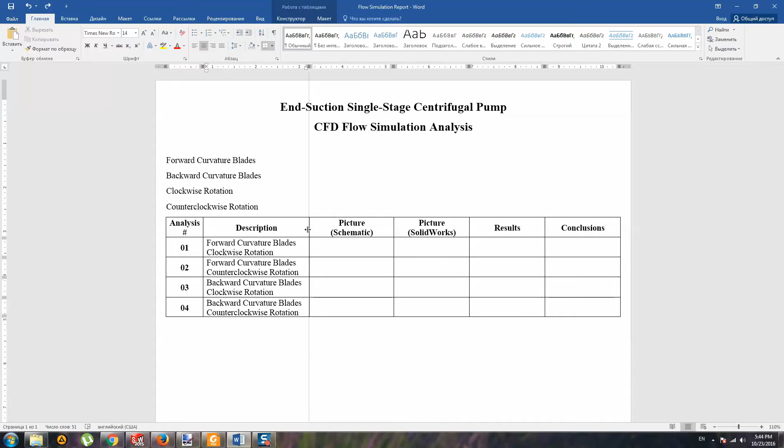For better understanding of what I mean about forward curvature blades, and about direction, counterclockwise and clockwise, I'll show you schematic pictures. This is forward curvature and clockwise direction, forward and counterclockwise. This is backward, clockwise, and backward with counterclockwise.

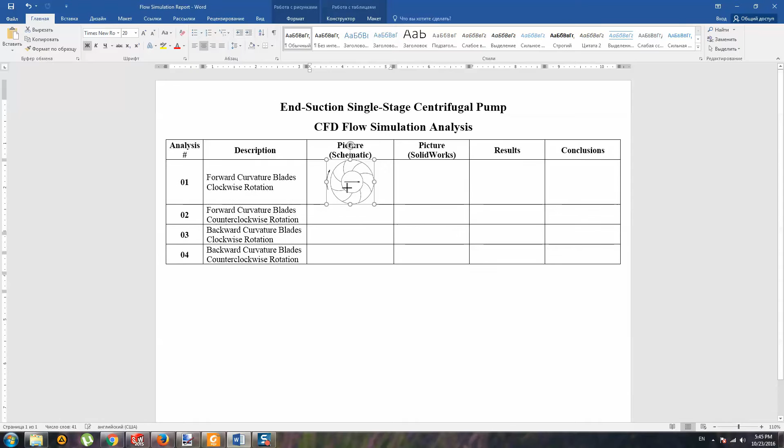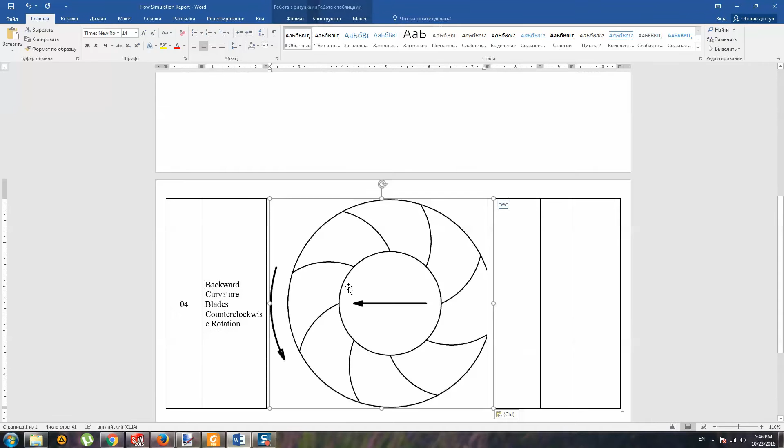This picture I'm adding in this chart. Need to make it some smaller. Yes, ready.

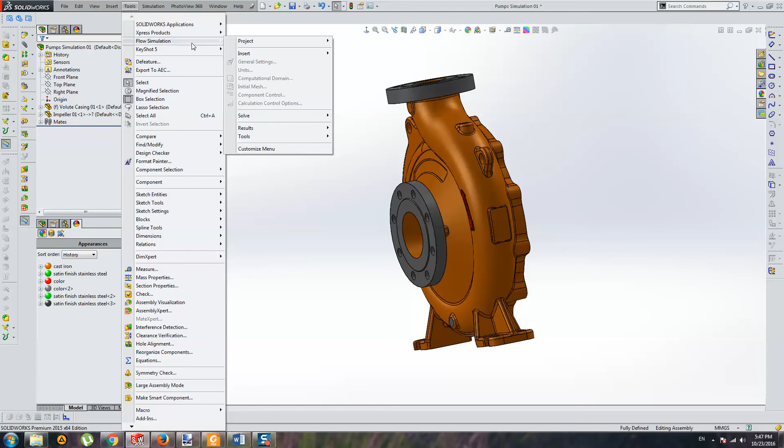What you need to know about model preparation for flow simulation: all holes, all fluid spaces should be closed. For example, I close these holes with pipes, inlet and outlet pipes.

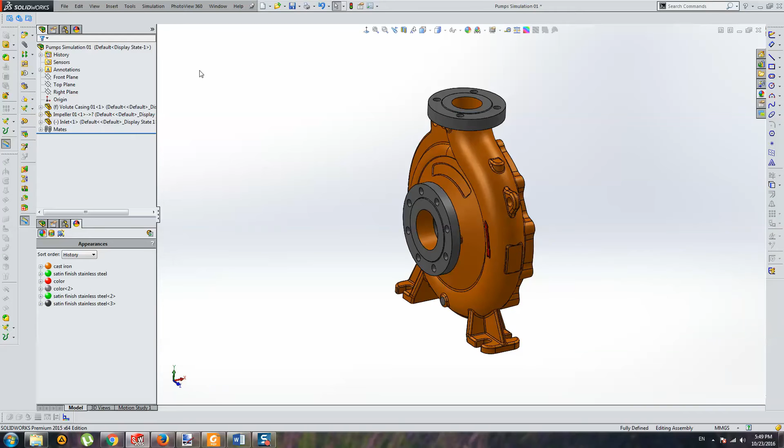Let's build these pipes. I create a new part, open this part, save as this part, and call this part, for example, inlet. Next, I need an outlet. Create new part, open, save as, and call it outlet.

Yes, ready. Let's build. Open inlet in edit part, and we can build a pipe for this flange. Convert entities. First need to create a sketch on this plane and convert entities, this edge. Yes, ready.

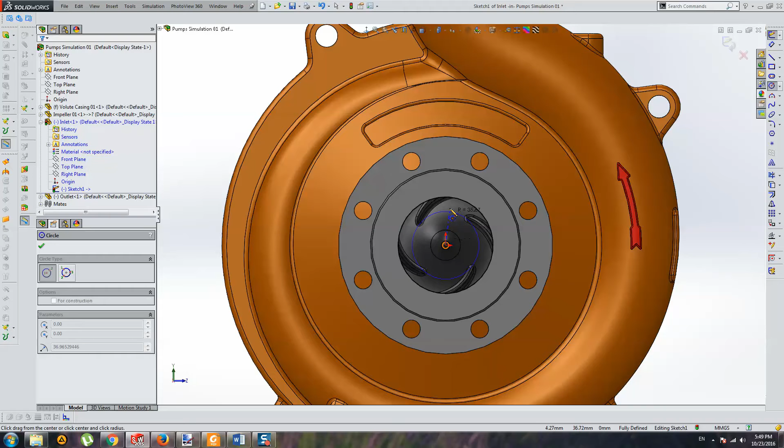Also, let's create wall thickness. I think maybe 5 millimeters, 6. Let's do it 6 millimeters. Having some problem breaking. 6. Ready. And extrude this pipe.

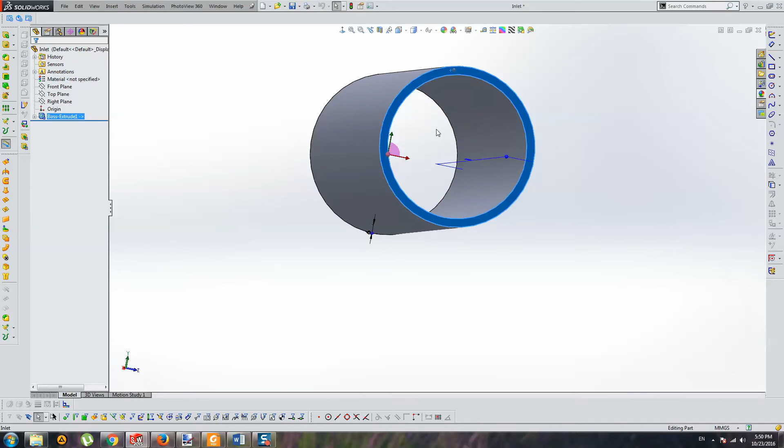For example, 250 millimeters. I can open it. Also, this hole should be closed, but you can close it in the model directly - this hole - but in Flow Simulation you have a function for closing this hole.

I'll show you the second version using Flow Simulation. And now let's build the outlet pipe. Edit part, create sketch on plane, convert entities. Next, make an offset entity of 6 and extrude this pipe in the y-axis direction. For example, it would be 2 meters.

Yeah, good - oh, that's big, very big. 1 meter. Half meter - yeah, half meter will be good. Ready.

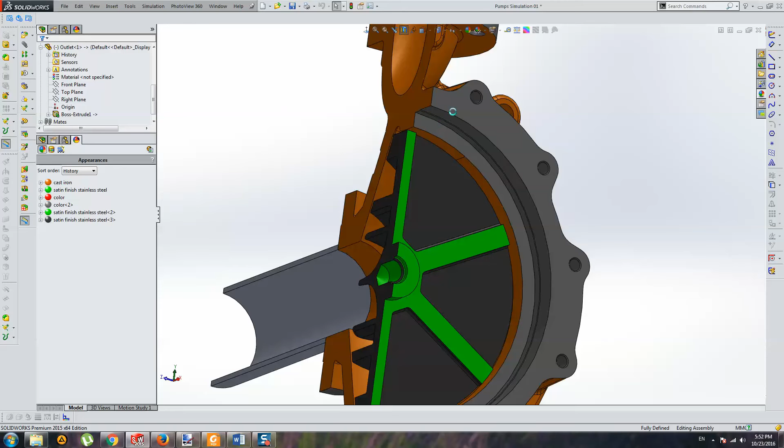Also, we have an open space in the back of the impeller - you see clearance there. Actually, in a real pump, it's closed by a casing plate. But we close it directly in the volute casing. Open this volute casing, and previously I closed this hole by extrude boss.

Ready. This hole is closed, and I have a fully closed fluid space for fluid running and the impeller rotating.

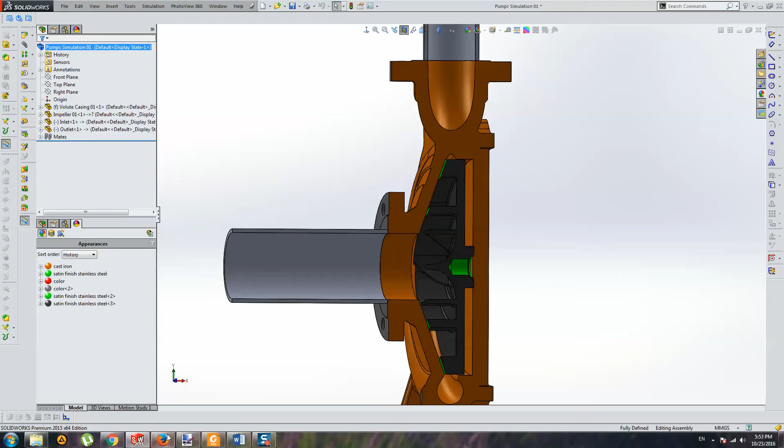Also, about impeller rotating, if you want to edit rotation zones, you must build this zone on the impeller. For example, I'll show you. Let's hide some components, the casing, and add a new part. Call this part, like, rotating vane.

And edit, create on all edges of the impeller. I'll show you how you can do it. I need to find the correct feature in my impeller.

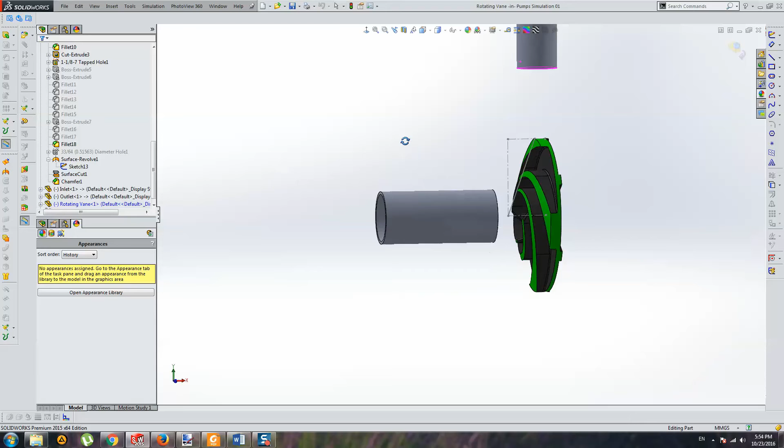Yes, this sketch I will use for entities. Choose the plane in rotation and build the sketch there. Yes. This rotation zone will look like an impeller but without blades. It's like a zone of rotation. I think you understand me.

This is a space of rotation for impeller. You can choose rotation per minute or radian per second for the rotation zone. You can choose direction of rotation, clockwise or counterclockwise, but all this function you will watch in analysis.

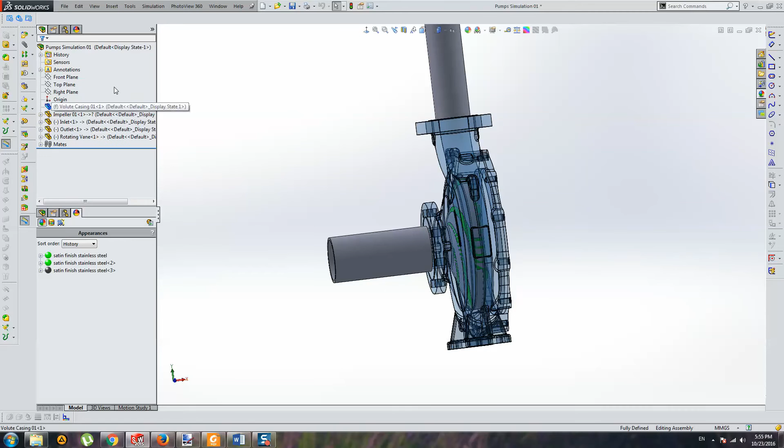Alright, now I have pipes, impeller, casing, all rotation zone, all my holes closed, and let's start to analyze it.

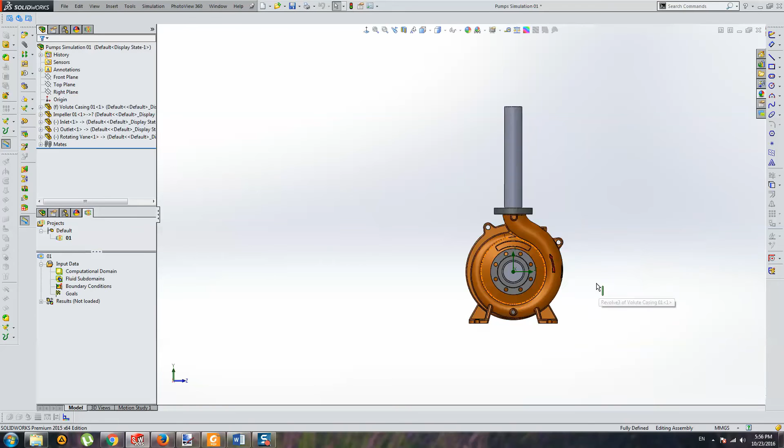But also you need to create a wizard for this project. For example, sorry, I made a mistake. Need to create from beginning, project, and you must create project with wizard. Yeah, call project like 01.

Next, choice units. You can use SI units, American units, custom units, or all your preferable units. I'm using for this project SI system units.

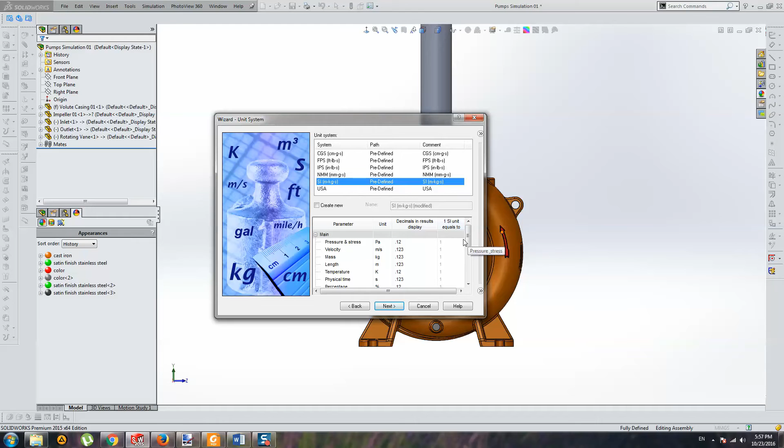Next, we research internal. We need to research internal surface of this pump. Choice internal, exclude cavities without flow conditions.

Rotation. Yes, we need local region, surrounding global rotation. Choice, we can use different types: gravity, for example, time dependent, radiation, heat conduction in solids.

Also set their direction of flow, which direction flow starts to go. X, this direction is the x-axis. Next.

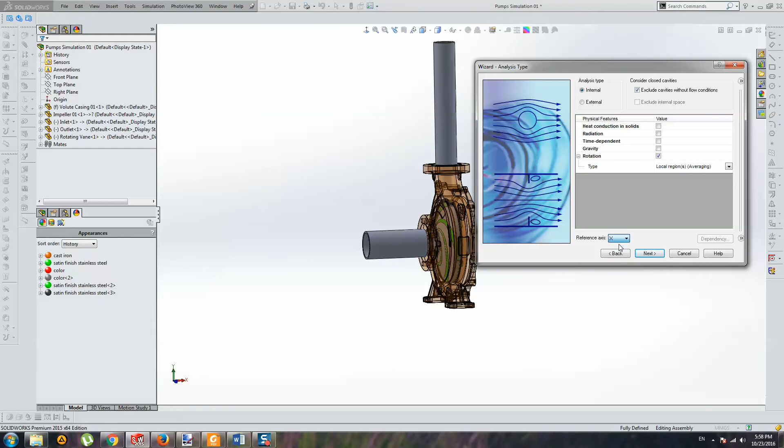What do we analyze? We analyze water. This pump, actually, I think for acid, is phosphoric or nitric acid pump, but actually let's research in this tutorial water.

Choice water. Choice flow types, laminar only, turbulent. We need, that's better, to watch on laminar and turbulent flow type.

Sorry, I didn't choice water. Edit. Yes, ready. Laminar turbulent cavitation. We can find cavitation zones.

Next, roughness, wall condition. For example, if I use casting, roughness would be 25 micrometers or 50 micrometers for casing. But let's edit there 25 micrometers. Next.

Initial condition. We have pressure, atmospheric, and temperature. Temperature, we have 20 Celsius. It's 293 Kelvin.

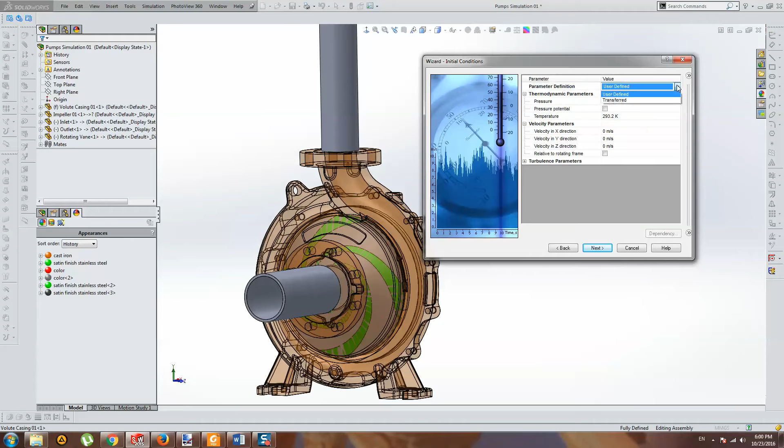But I don't research this function. I think I can do it in the near future. Let's leave it.

Next, we need to set a mesh for calculation for the results. Let's choice five quality grade. It's quality grade for meshing. Let's choose 5. Finish.

Now we have project number 1. What do we need to do there?

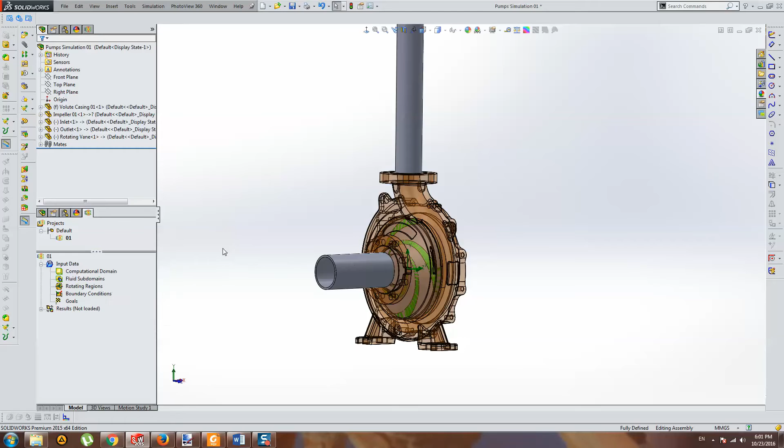I think we need to close this holes. Yeah, need to close these holes in pipes. Sorry.

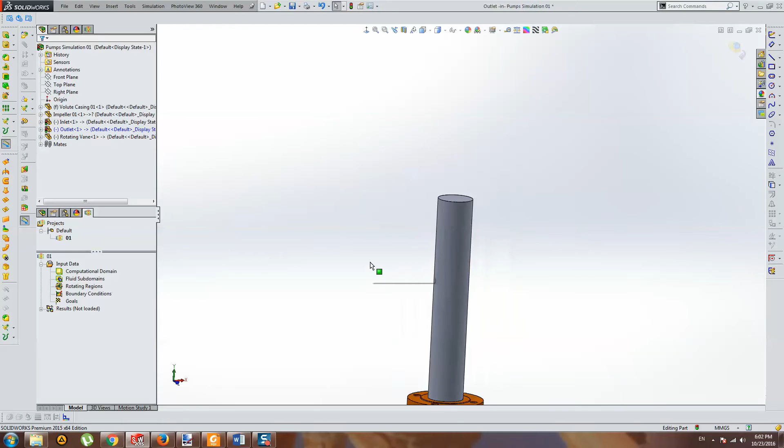Ready. Make it transparent. Next, wall, pipe there. Make it transparent. Also make transparent, rotation zone.

Rebuild. The geometry of model or project setting have been changed. Do you want to reset the computational domain? Yes, yes.

Yeah, and if you see now, we have a parallelepiped. This parallelepiped only for flow zone. Now all our zone is closed by cap, plug, and this parallelepiped could not be built before because I had opened pipes. Now we have a parallelepiped for calculation.

This zone will be only for calculation, like we chose internal cavity. Let's prepare a model for calculation.

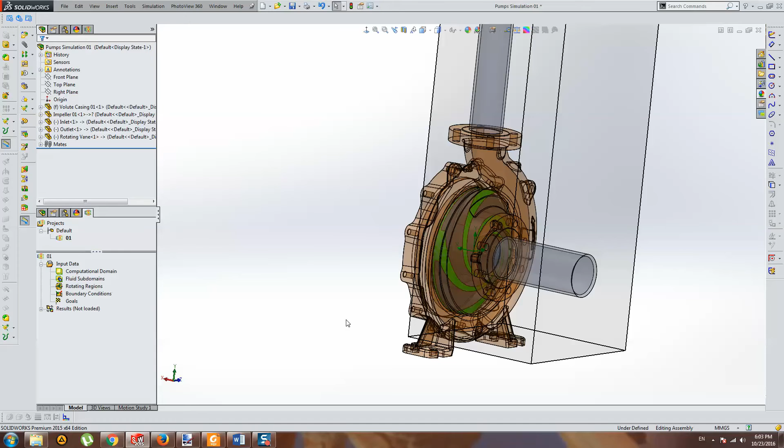We use in first analysis forward curvature blades and clockwise rotation. Let's choose and edit this region. Insert rotation, choice rotating line. We see rotation in counterclockwise direction.

But what we do, we set minus, for example, 3000 RPM. And if I fix this and open

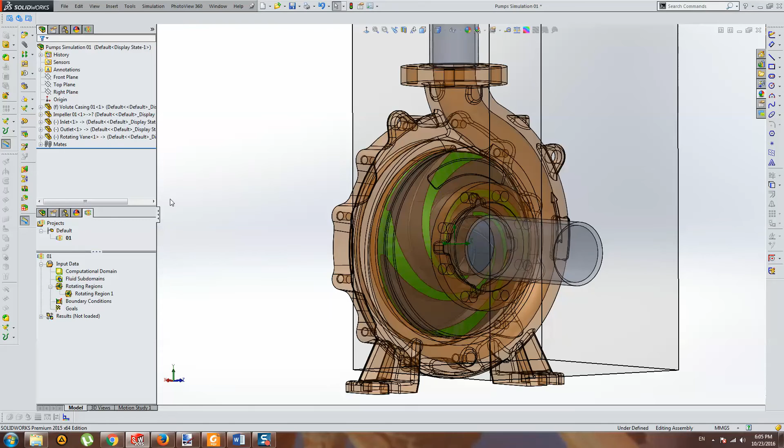next time, we see conversion in radian per second. I think everything is fine. We can use radian per second, maybe 2000 RPM. Did you see this value is changed? System automatically converts units. Let's use 3000 rotation per minute.

Yes, ready? We set rotation zone. Next, we must insert boundary condition. For example, it would be an environment pressure.

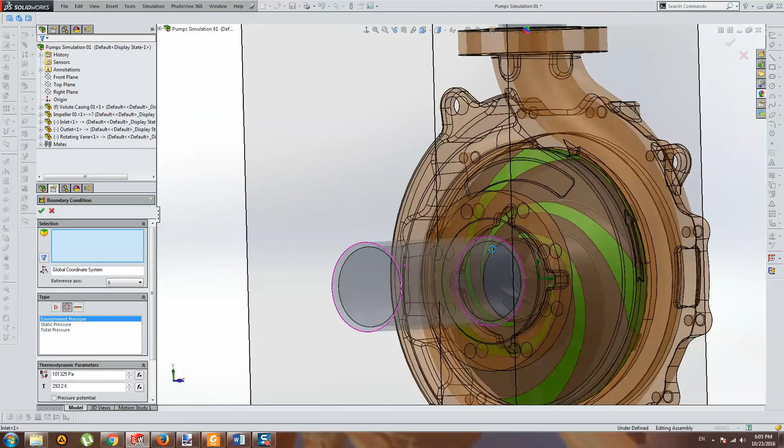And this unit, choose face for this boundary condition. I think to choose and cap plugs of pipes, outlet and inlet pipes, but we can click on this face inside the pipe. I'll show you how you can do it.

Click right button on mouse and choose select other. Select other, you watch different faces which switch by orange color. We need this face. Choice, yeah, ready, and see this face in the boundary condition.

You can set environment pressure. Use environment pressure as atmospheric. Alright.

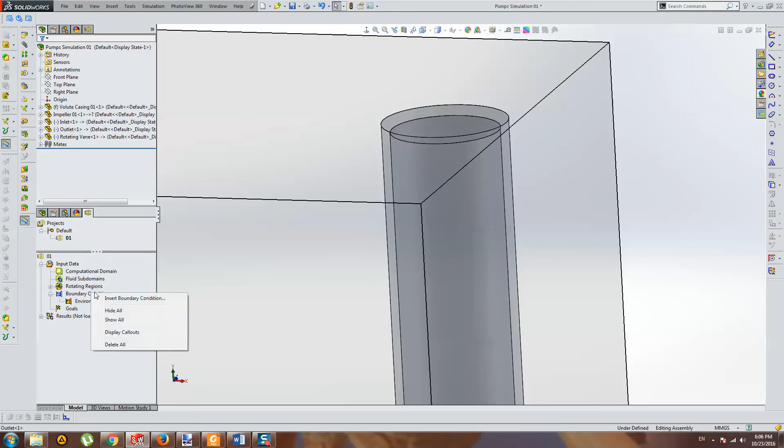Next, boundary condition for outlet. Edit, insert, choose environment pressure, select other, choose face inside the pipe. Okay, ready. Which next?

You can insert goals. You can choice or insert goals which you want to research. For example, you can research pressure, static, total, dynamic, temperature, different density, mass, velocity in different directions, summary velocity, time, viscosity, different parameters. Also, you can choose average, minimum, or maximum value of these parameters.

Let's choose average, for example, pressure, static, total, dynamic. Also, we can use temperature, velocity, for example.

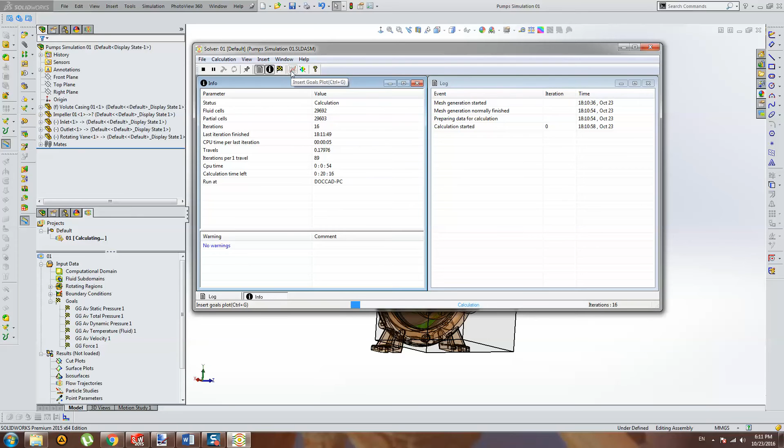Now my computer is calculating time for this solving, and estimated time is 20 minutes for solving of this model. Insert goals, insert preview - yeah, really, I can watch a preview of solving. Let's do it. Did you see?

It's pressure calculation. We can watch interactivity of calculation.

If anything goes bad, you can stop your calculation.

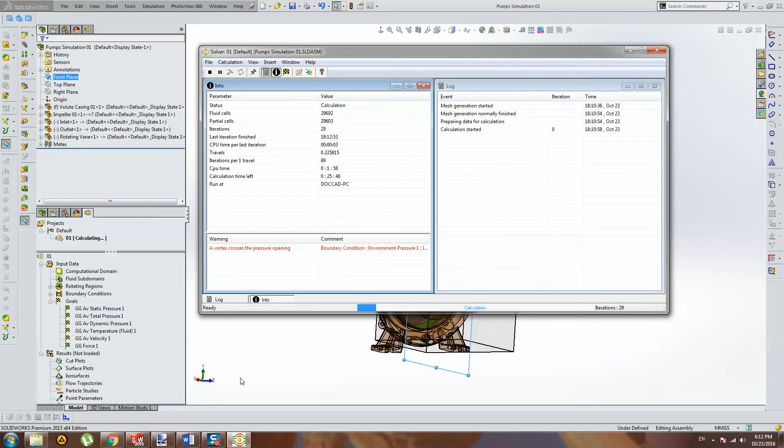Continue it after solving and show you result analysis. Okay, let's go back again - solver is finished.

There's some overtime for this calculation - my computer finished it in 10 minutes. Close this solver.

Back again - rotation region, ready. Let's watch what these add-ins for SolidWorks give us.

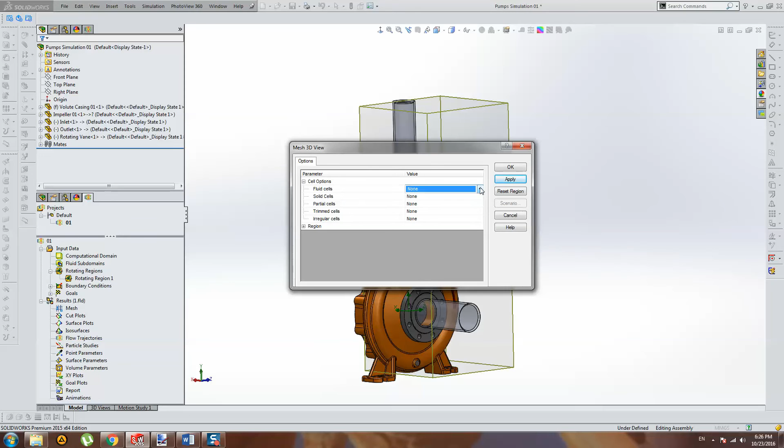We can watch mesh, 3D view - for example, like this. But this result is not interesting for us, it's only the calculation region.

We can watch cut plots. We can insert this cut plot. We can move the cut plot in all directions of our calculation zone. We can change the plane of projection for the cut plot.

For example, right plane - you can move the plane cut plot there. Let's watch what will be going on in the impeller surfaces during the rotation.

Let's choose displaying of results like contours, isolines, vectors, streamlines. We need to choose the result we want to watch - for example, pressure - and number of levels. We can increase this level to 20, and okay.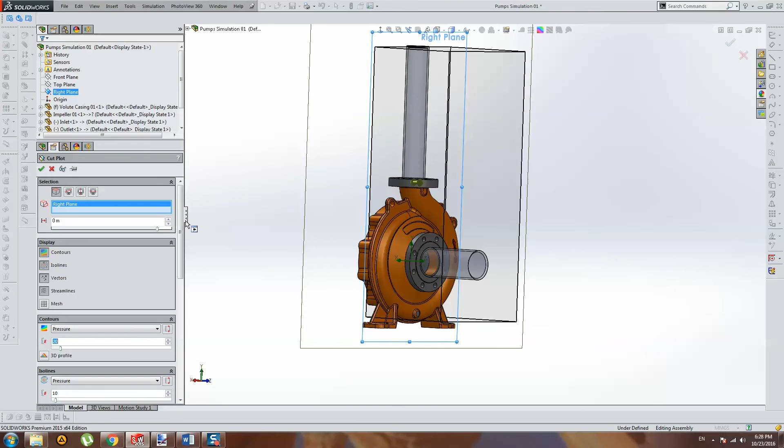We have the cut plot. Let's hide some components there, and we can watch what happens when our impeller rotates in a clockwise direction.

Did you see this zone? It's like a swirl, whirlpools - yeah, whirlpools or swirl, there.

We can also choose to edit this definition, and we can watch not pressure, but temperature.

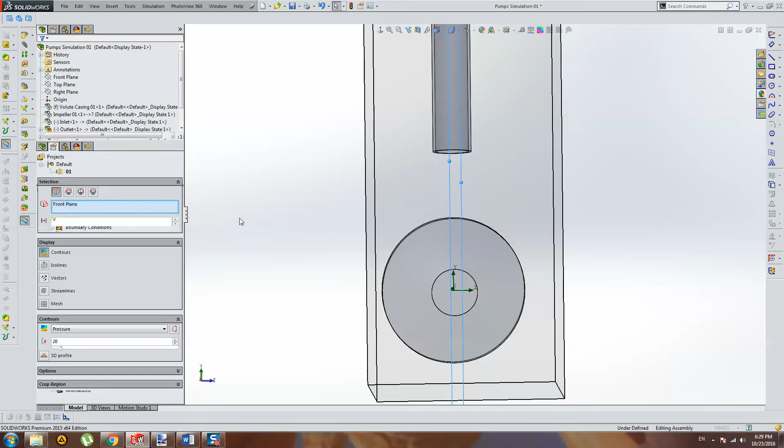I'll delete this and create a new front plane. We can change values for temperature, for example, like this.

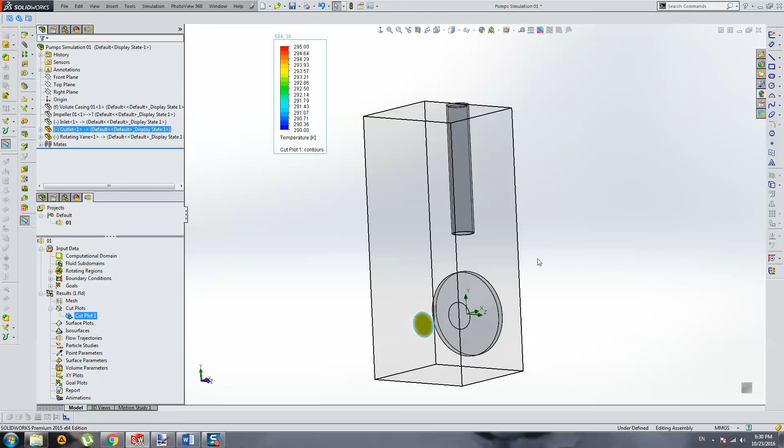I think we can animate - yeah, we can animate this cut plot. It's like going forward and back. Stop animation.

Oh, it's - we don't need this, it's a capture of result. We don't need the capture.

Delete this cut plot, and also the surface - you can insert surface plots. Let's try the surface plot.

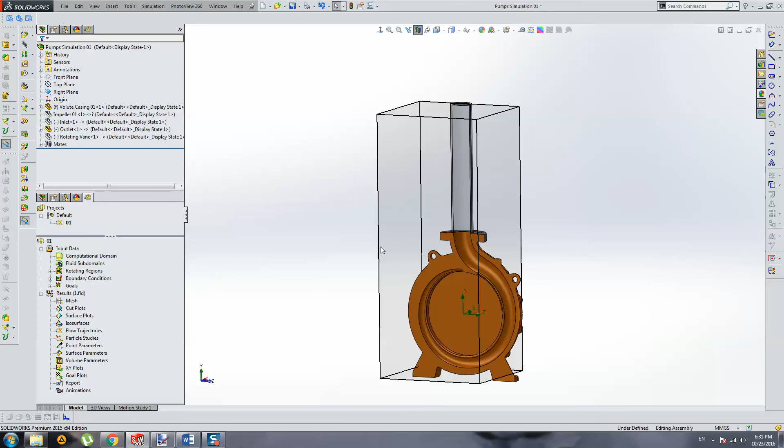I need to choose a surface - for example, it would be a wet surface inside the casing of the pump. Choose result: velocity.

Change this definition - no change. I don't know how to use this surface plot because it's my first analysis.

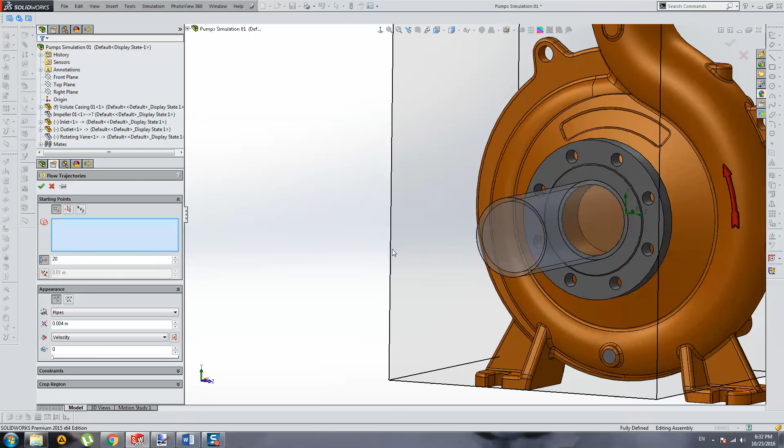Let's watch trajectories of flow. Yes, we need to change the choosing - need to choose any face sketch. I think I can choose.

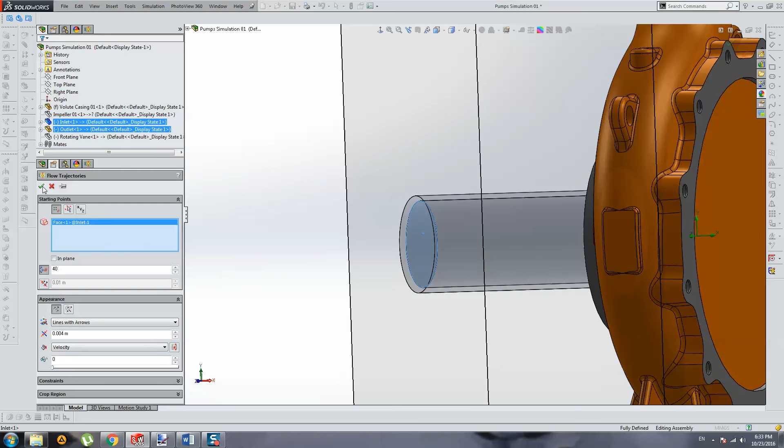Arrows - let's choose lines with arrows, and which parameter we want to research: velocity, for example. Check OK, press OK - yeah, and we watch the flowing of

our resulting fluid calculation. Change this definition.

Example: 50, maybe 60, 70 - 70 is very big, 65 - yeah, we have 65. 60, maybe 60 maximum.

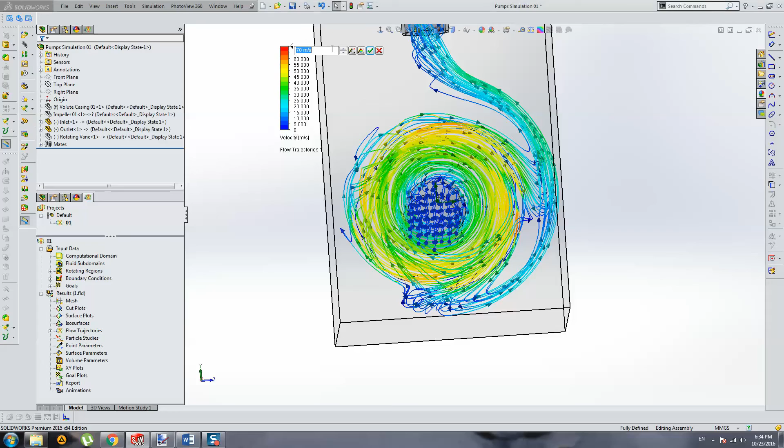It's maximum velocity - we have 3D trajectories of our velocity visualization. We can also play and make this.

Did you see? Fluid running, it's not correct. We chose incorrect direction of rotation for the impeller. In the next analysis we use the correct direction of rotation and vane curvature, and you'll watch a better result in the next analysis.

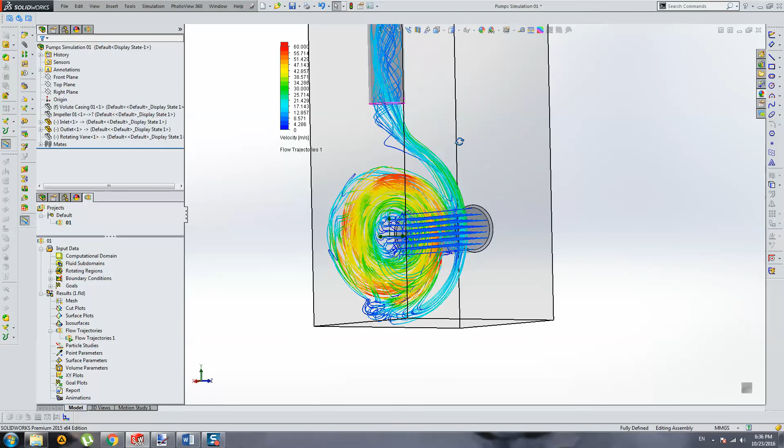Alright, let's keep this result, save. Stop animation, height 0, show all our parts in this analysis, save.

And copy these files into a new folder. Create new folder, second analysis, and insert there. Rename files.

Open with button in SolidWorks. Choose pump simulation second, and change references on model. As we see, this assembly uses volute casing number 1. We need to change it to number 2. Impeller is number 1, and we need to use impeller number 2. Okay, ready, and press open.

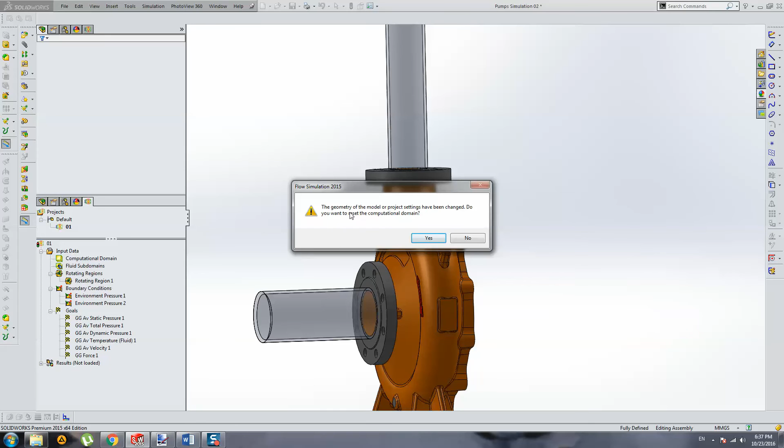As the geometry of the model has been changed, it wants a reset. Alright, let's reset.

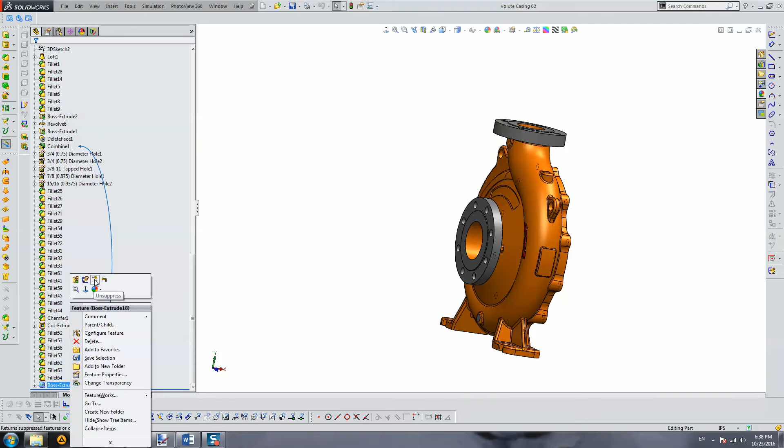I think, yeah, maybe like that, use a region. Oh, sorry, I'm sorry, very sorry. I have one opened space, I need to close it. Yeah, ready, let's close it.

I think this result must be changed in the directory, in the folder. Yeah, it's in the folder directory. I'm only changing the name for this analysis.

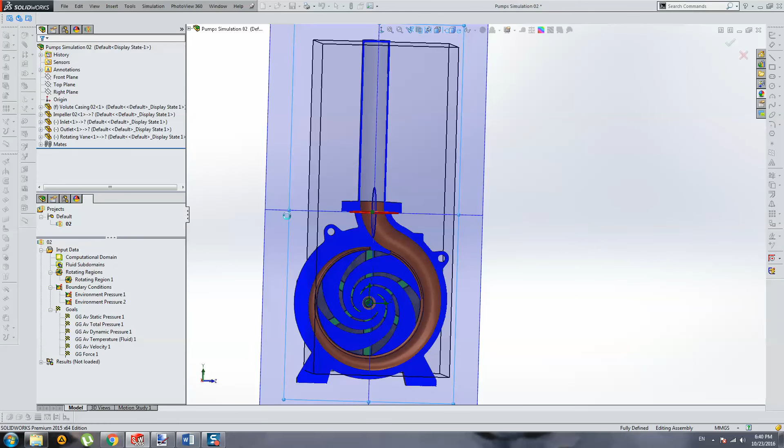I said that I use forward curvature blades, but for this direction of rotation, this blade is backward. For this rotation direction, if you see, we use backward curvature blades.

Alright, we need to resolve, we need to run this project. Don't take the previous result, new calculation. Use all cores of my computer and run.

Solver is opened, and I need to wait when this calculation is finished. Calculation has started. Now it's 5 minutes into the calculation, and it needs approximately 8 minutes to finish.

I want to show you how you can watch results interactively. Choose insert preview, then choose the plane where you want to watch, and cut plot. Auto mode of showing. Let's watch in contours on the front plane. Choose the result parameter you want to watch, for example let's watch velocity there. Resolution, attributes, image, options, region, and press OK.

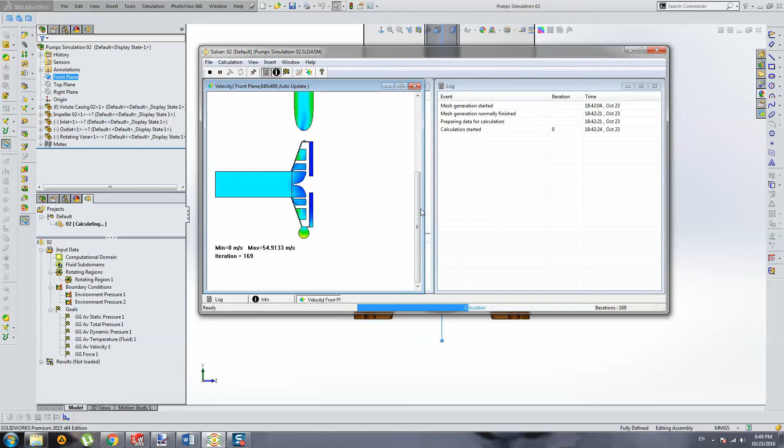Yeah, and you can watch what's going on in the cut plot of the front plane at iteration number 169 now. Minimal velocity is 0 and maximal velocity now is 54.9133 meters per second. Also, you can make this cut plot on the right plane, for example, and watch what's happening there.

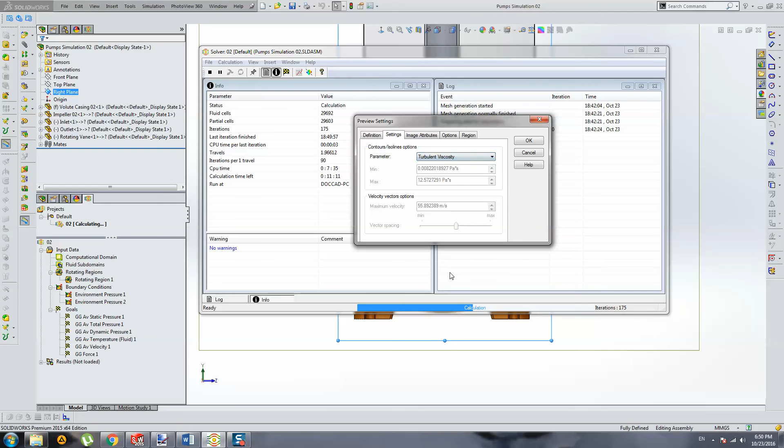Also we can change the parameter. For example, let's choose also the right plane and change the parameter to temperature of fluid. No, temperature isn't interesting. Pressure, maybe pressure. Turbulent viscosity. Or pressure, let's watch pressure.

I must stop my capturing software because it takes many resources from my processor, and I need all resources for fast solving of this model analysis. Alright, solver is finished.

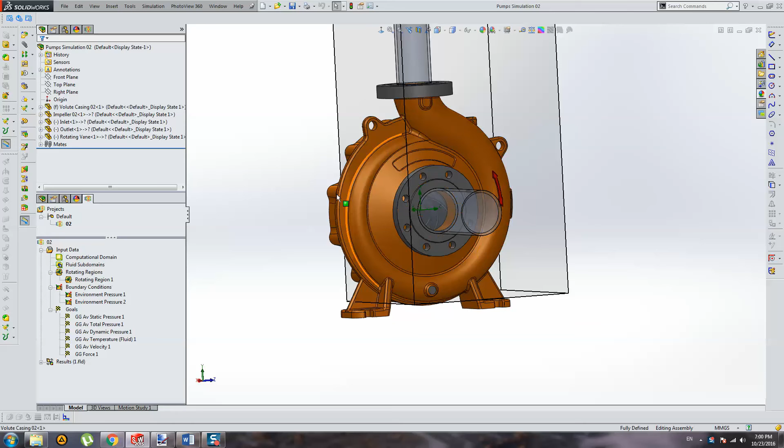Closing this solver, and we have second results for counterclockwise, for correct counterclockwise direction of impeller rotation.

And let's watch a cut plot example. Insert cut plot on the right plane, choose velocity, and insert it. Hide some elements.

Now I can find the lines, vectors. I can find swirls there. We don't watch swirls of fluid, all the fluid is going correctly in direction.

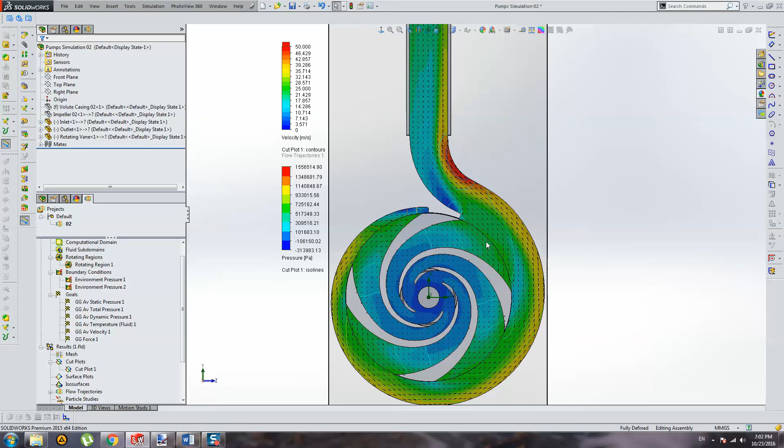I like this result, but since we have analyzed different results, I must make this analysis to show what happened in that case.

Let's watch the cut plot of pressure. Change it to density.

We can also use the 3D profile, but I don't know how it's working now.

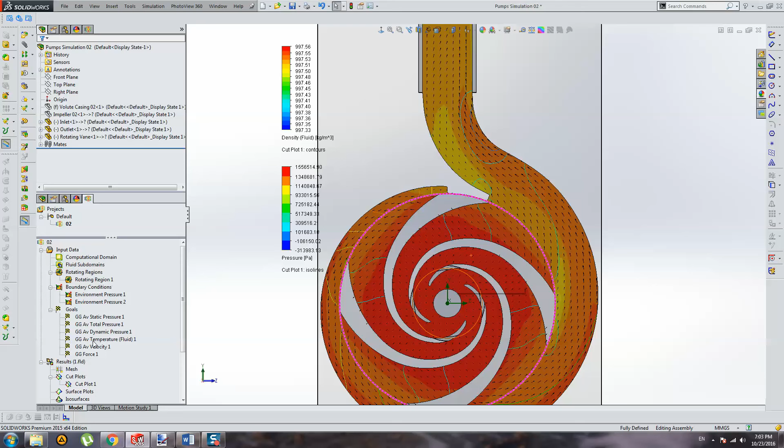Let's watch trajectories. Yes, we have lines with arrows, alright. Let's change the density of arrows to 60, make it better, or 80. Yeah, better. And let's animate this.

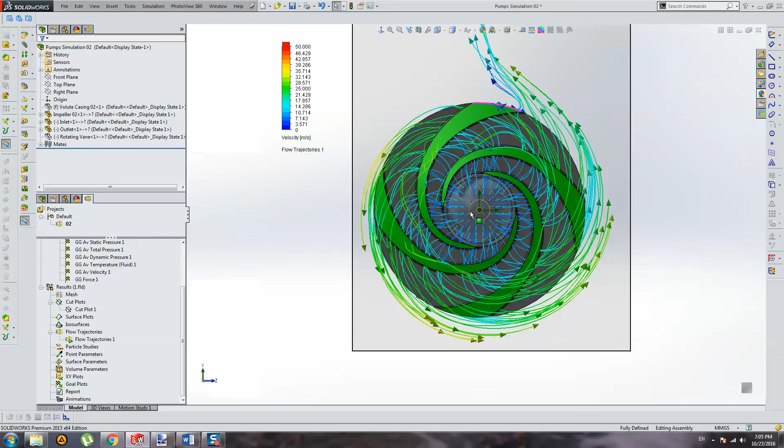Also I can find swirl or whirlpools there. Hydro heatings, I think, in my language, water hammer maybe - yeah, water hammers. I don't watch there, I don't see water hammers. I think that's a fine result.

And we can begin or continue with the third analysis. Let's keep it, save this result.

Go into our folder, copy, paste, change name - some problem there. Delete, no it's not more.

I think there's some problems, need to open again. Change names, yeah.

And open the third project. Change references to volute casing number 3 and impeller number 3. Okay, open.

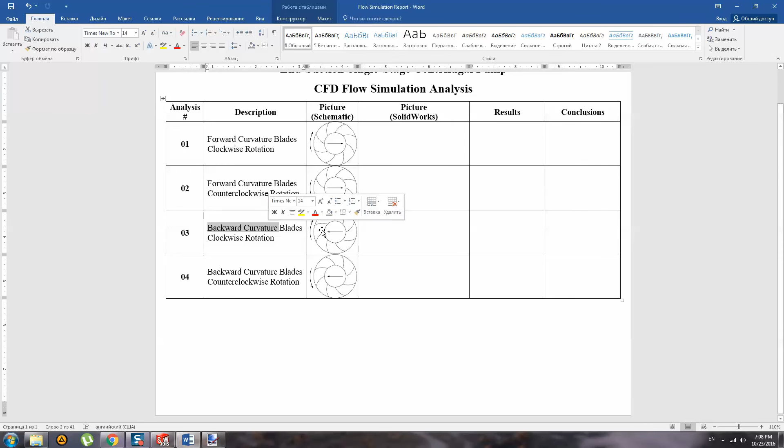Hide. Open impeller. I think I can make it faster. Yes, I have one blade of the impeller. I try to think how I can do that there. Maybe like this - mirror pattern.

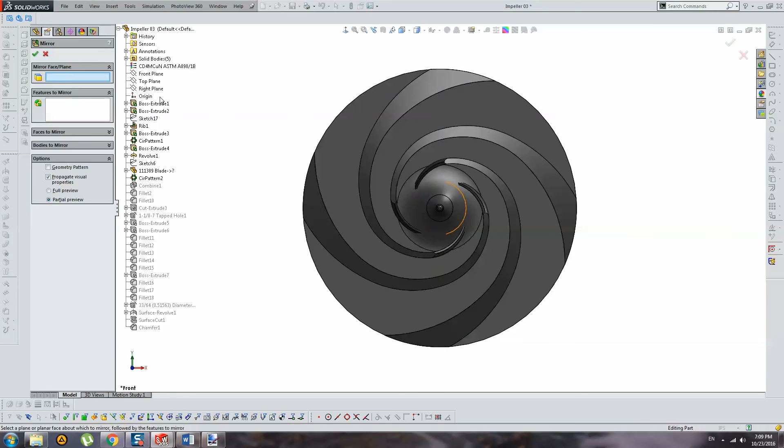Make a mirror pattern on right plane and copy all these blades. Now these blades are crossing together. I need to remove excess bodies, excess blades, this, and this blade.

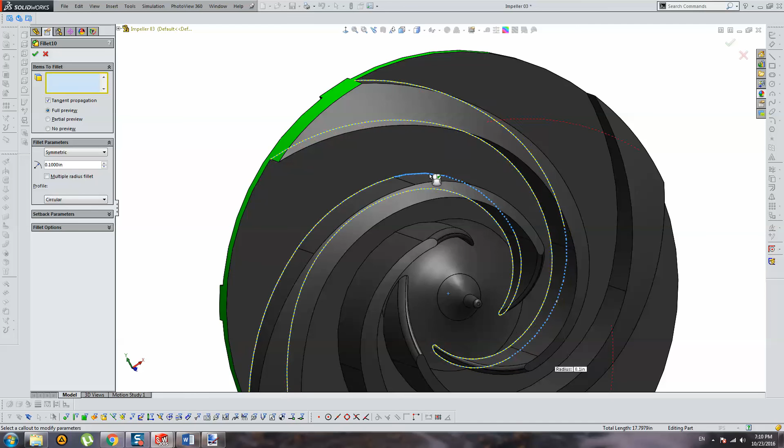Now if you watch, direction for impeller blades is changed, but I need to fix some problems in future, tree combined with another solid bodies. I think fillets should be there, but I think it's not critical to create fillets or any small elements. You need calculation, you need to watch result, and these elements like fillets and other small elements will be excess for calculation.

Time of calculation would be higher, larger. Yeah, ready? I change geometry.

Also I need to change direction, rotating, edit definition, and with minus. Ready?

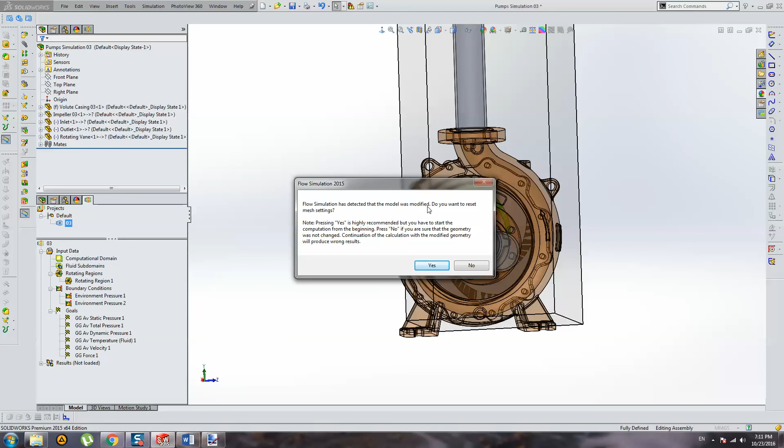And start to solve. Run. Flow simulation has detected that the model was modified. Do you want to reset mesh settings? Yes, we reset meshing. Now model is remeshed.

When I press run, new geometry is remeshed. Choice not choice, take previous. New calculation, run, and wait for solving.

Analysis was finished. Let's watch results in SolidWorks screen. First, watch cut plot, show.

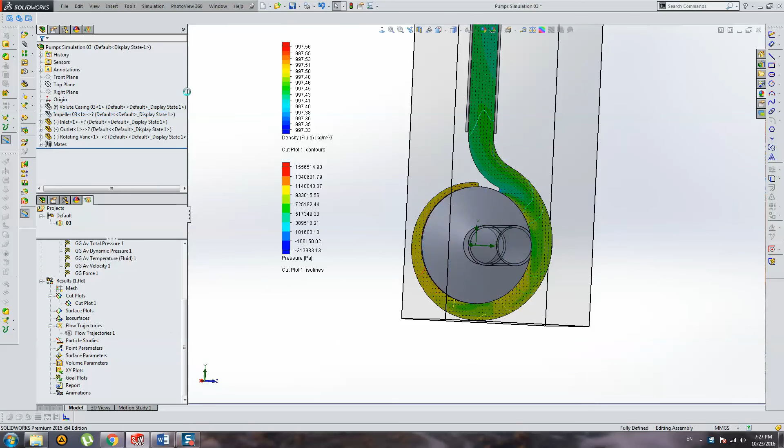Need to remove the impeller. Velocity choice. Right, yeah.

Also, let's edit the streamlines. Did you see this swirl? Swirl there.

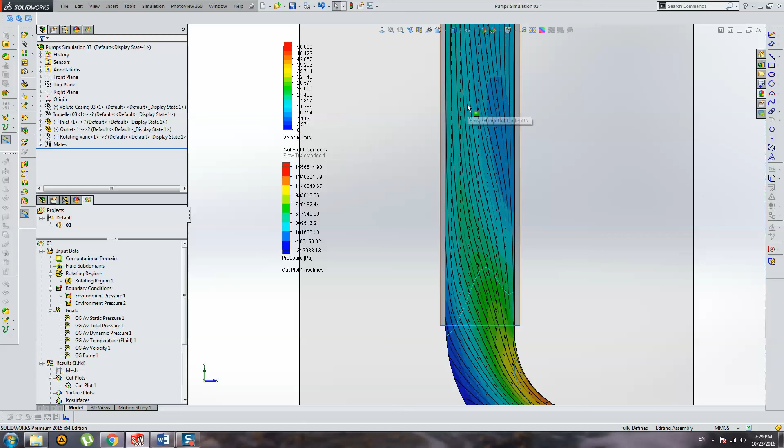Velocity lower than in previous. More high velocity on impeller vanes, but in outlet pipe velocity is approximately lower than 20 meters per second.

Because it's incorrect rotation. I chose an incorrect rotation for impeller. Let's watch trajectories.

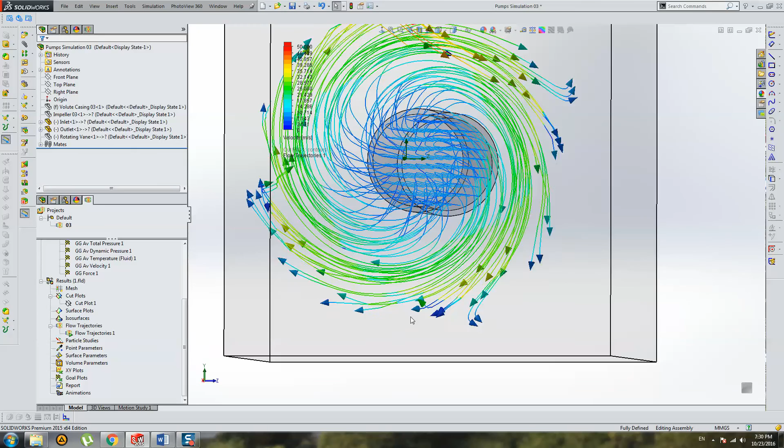Animate this. Yes, if you see some curls there, swirls, curls, it's not a good result.

Let's watch pressure, trajectory, pressures. Higher pressure inside impeller rotation vane.

Alright, let's finish it and start with force analysis.

Rename, sorry, rename parts, rename assembly, and then open with new references. Ready.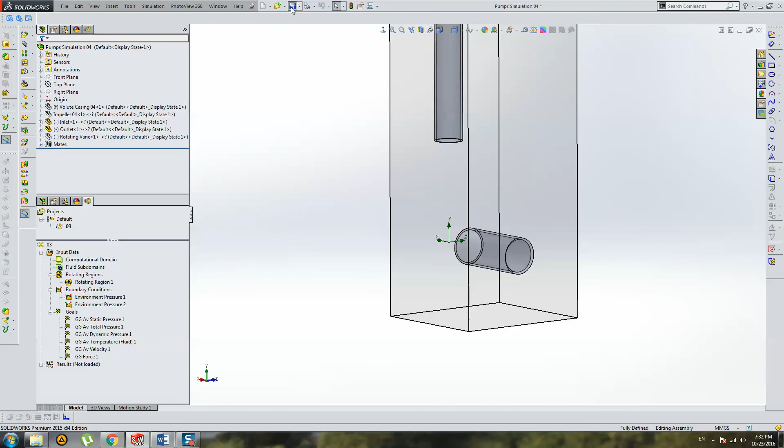Last analysis, need to change rotation in counterclockwise, and we have, I wrote backward curvature, but we have similar direction of blades and rotating. Let's watch what we get when calculation is finished, but change rotation in another direction.

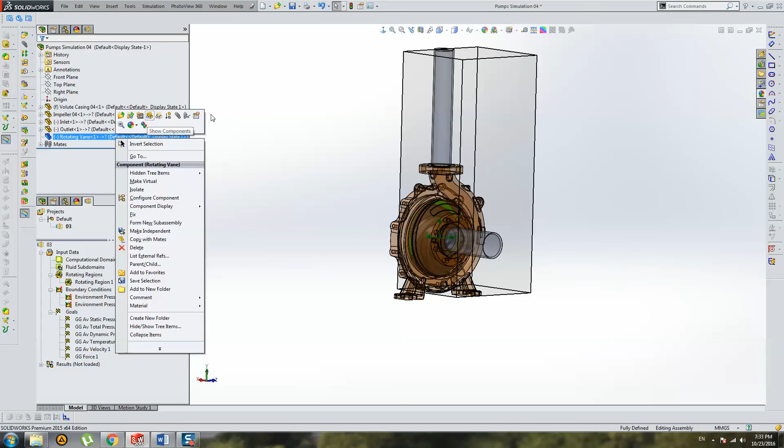Yeah, ready? Change name for project and run.

One minute, sorry. Yeah, ready? Need new calculation choice. Run. And wait. Alright, last analysis was finished.

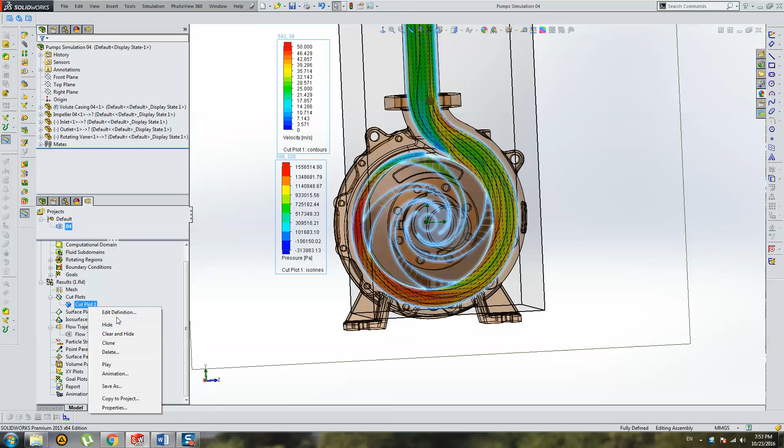And watch what we get. Let's choose cut plot, show it. Watch velocity, yes. Let's check, yes, we choose velocity.

And hide these elements. Did you see? Very fast velocity on impeller vanes.

Maybe 65 meters per second, and maybe 20, yeah maybe 30, 40, 32 in outlet pipe.

Let's go back again. Let's watch streamlines. Streamlines is chosen. I can see curves, swirls.

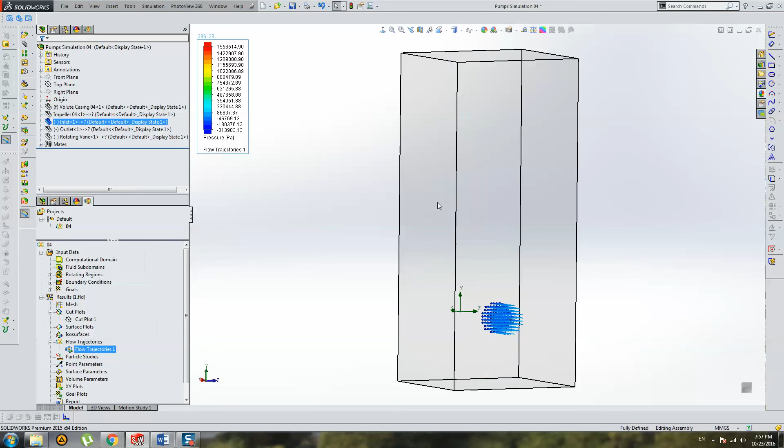Pressure with minus value.

Let's watch speeds, sorry, velocities.

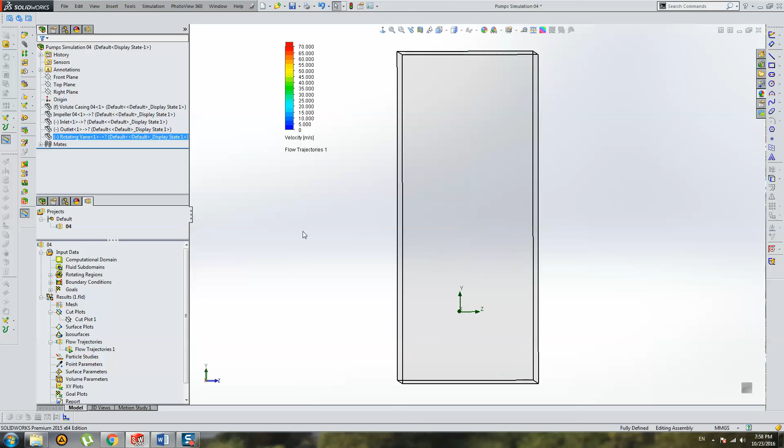And we can make a conclusion: we need rotation of impeller for this pump to be in counterclockwise direction. This direction, counterclockwise, but better result I think is second.

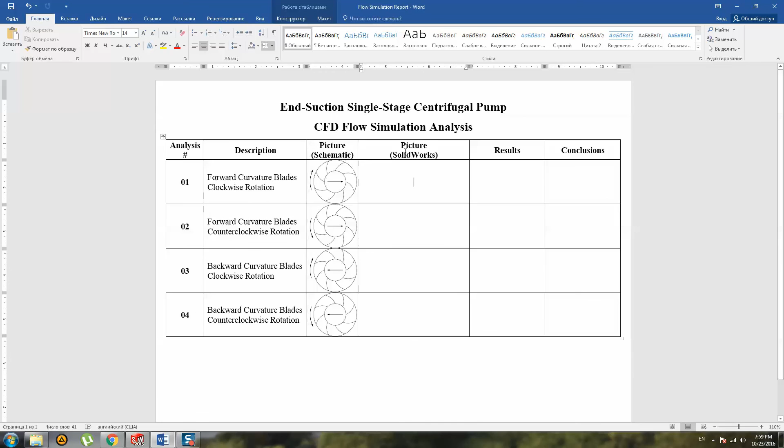Let's make, I need some time to make screenshots and edit this in the report, and then we can analyze which result is better.

And now I have a screenshot for all results of analysis. All these screenshots in the report for velocities and pressures research.

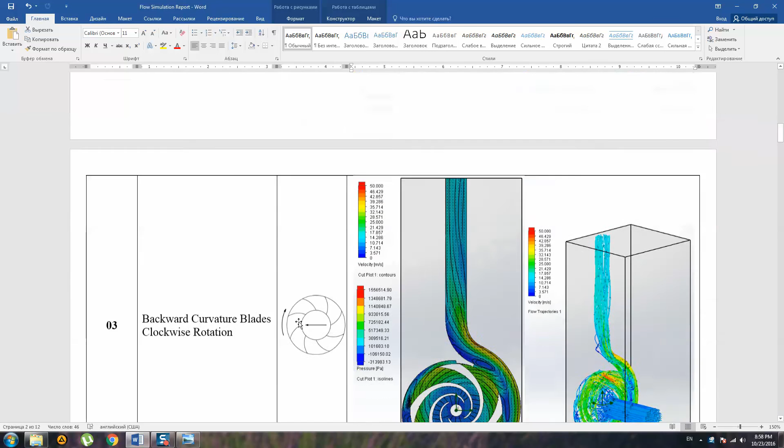If we watch pictures after this analysis chart, these pictures, first analysis, what we get.

We get these curves, cavitation on the cavity of the pump. It's not good for pump working.

Different pressure and low pressure in outlet pipe. That's not a good result.

Let's watch velocity for this analysis is lower than, I think maximal velocity is 12 meters per second.

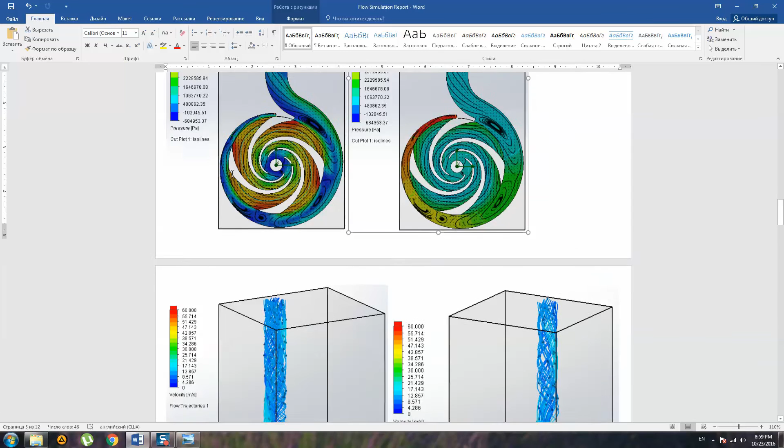Let's watch next analysis. There we get velocity, average velocity 25 meters per second.

We have good pressure in the outlet pipe. There is good result, and this is the original result of original pump using.

That's isometric views. Next, third result, we also have curves, cavitation there. Velocity not lower than, not higher than 12 meters per second.

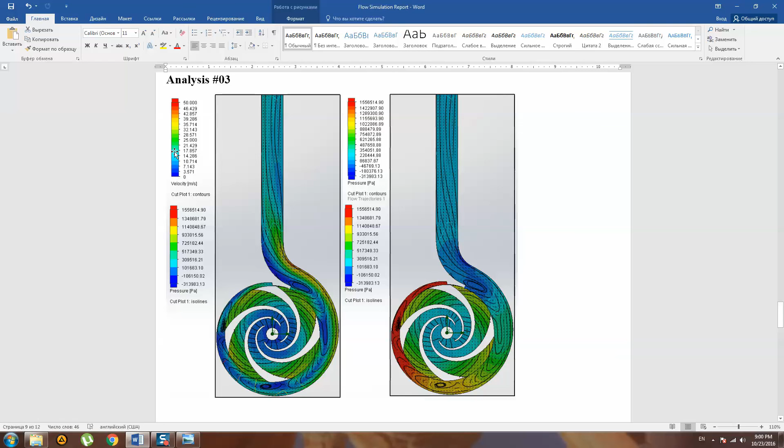And last result, where we have a low minus direction pressure. Let's fourth analysis. I think the best result is second. It should be correct. Others also can be correct results, but we choose second.